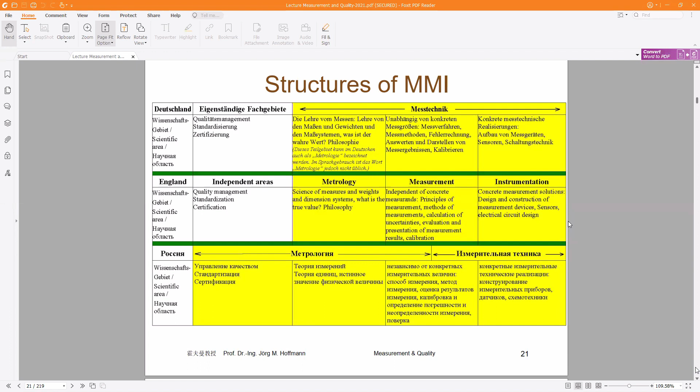Really sure at the moment. Oh, sorry. Sorry, here was a mistake. Can you see my slides now? Yes. Yes, that's great. Then has it worked? Yes, that was the last slide from the last lecture, I think.

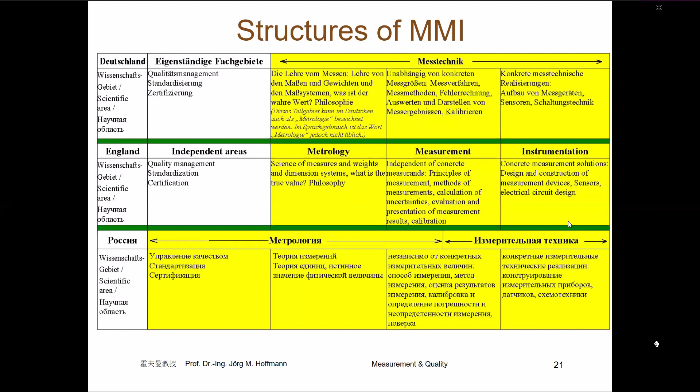You have seen that we have different definitions of the areas of measurement and instrumentation in different countries. And that was, let me say, the end of the last lecture. And now we start with the concrete content of measurement and instrumentation. What I will tell you next is valid for every field of measurement. Everything you would like to measure, it is valid for that.

When you measure a temperature or a speed or a voltage or, let me say, strain or what else, what we speak about in the next lectures is valid for everything, and therefore it is very important. That means I explain to you at first the structure of a measurement system, and after this we will speak about the calibration of a measurement system, and we will speak about errors, random errors, systematic errors, two different kinds of errors, and all these things are valid for everything you would like to measure.

Let me start with the general information system, and you see here the boxes. The first is the information source. We call it also a process. A process can be everything. That can be a room. And in this room an infinite number of informations can be produced. For example, the temperature, the humidity, how many people are in this room, the pressure, the brightness, everything is possible. And then you have the signal conversion with the sensor.

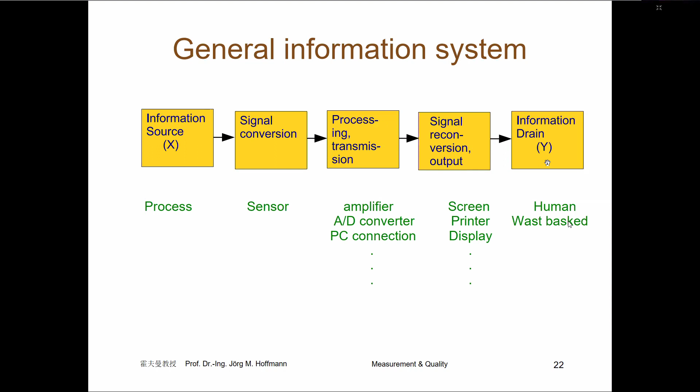Now, I go a moment back. I have told you y is x. It's the only right function that we aim for over the whole system. But in many cases, it isn't so. It can be linear, but it must not be linear. And here I have now connections between the input and the output side for the static behavior of the system. The static behavior describes the dependence of the output value y from the input value x. Normally, it should be y is x, but it must not be so.

So, where is my mouse? Sorry, I must look for my mouse.

Now we have it. During the static status of the system, and then is of course the question, what is the static status of the system? The static status is achieved when, with no changes on the input side, all dynamics on the output side are finished. Both input side as well as output side are in a static status. That means you should have no changes on the input side and you have no changes anymore on the output side. Ideal would be the behavior y is x, but it must not be.

It can also be in this form, and you see here you have a linear function with an amplification. The m is the amplification and n is the 0 point. You see the n is not 0 and m is not 1. Normally m should be 1 and n should be 0, so that you have y is x. But in this case, it isn't so. And you can also have nonlinear functions. In many cases, you have nonlinear functions, especially from the sensors. And then you can describe the amplification and the 0 point only in a very small point.

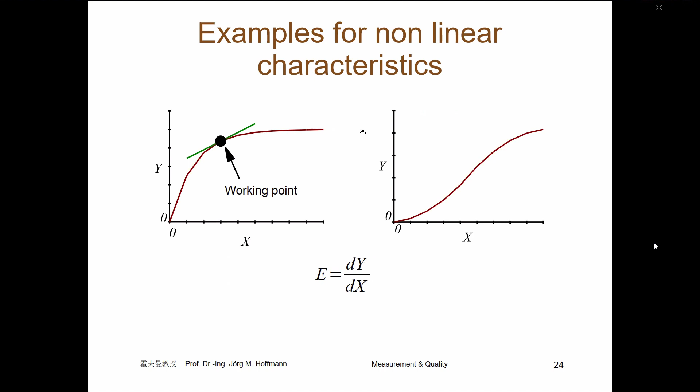But let me go back to this point. We say you have no changes on the input side and no changes on the output side. Then you look for the dependence from the output to the input side. The dynamic behavior is what the device is doing in the time until the static behavior. And now the question is, where is the dynamic behavior finished and we speak of the static behavior? The theoretical definition is when there are no changes on the input side and no changes on the output side. But when is that theoretically? Theoretically, that is in an infinite time.

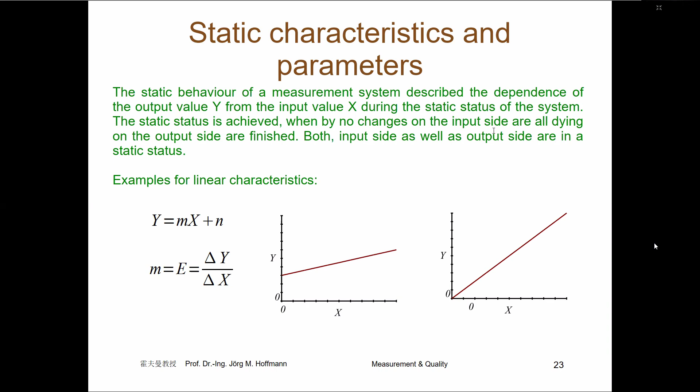When you have, let me say, a thermometer, and you put the thermometer in cold water, you see how the temperature is going down, or in hot water it is going up, and it will decrease or increase until a static value. But when you look with a magnifier and zoom in, you will discover that you have every time again a little change. And so the static behavior is achieved in an infinite time. That is the theory. But for practical work, we need a different definition for when we declare the dynamic behavior as finished, when we declare it is now in the static behavior. And how that works, we will see now.

Here we have the definition of the dynamic characteristics and parameters. The dynamic behavior of a measurement system describes the dependence of the output value y from the input value x until the static status of the system. And we have learned already the static status of the system is achieved theoretically in an infinite time. You will normally never get the static behavior in practice.

And to clarify that, we look at how we measure the dynamic behavior. You have here a function generator, you have the measurement system, and you have a registration equipment. And let me make a very easy example. You have a pot of hot water. That is your function generator.

When you measure the temperature, you put a thermometer into this pot of water, and you see how the thermometer is going up with the measured temperature. That means the measurement system is the thermometer, the function generator is this pot of hot water, and the function is a jump function. You jump with a thermometer from, let me say, room temperature to the hot temperature. It's a jump from one value to another value.

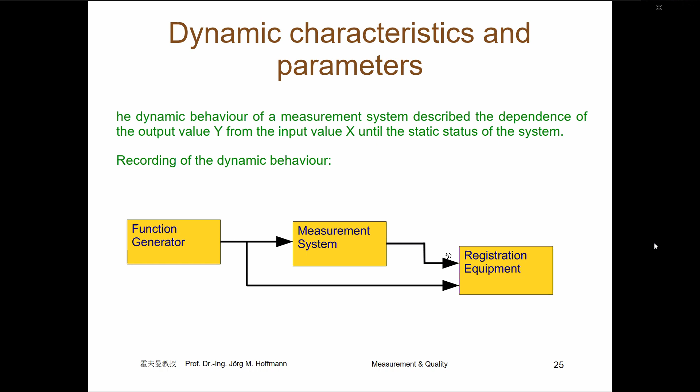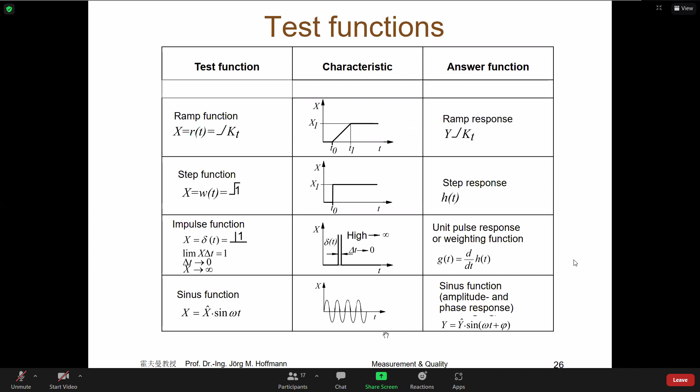Then I go a little bit back. What I have explained now is this so-called step function or jump function, where you go from one value to another value. You can unify it to one, so that you have every time the same function. In a time t0, you go from one value to another value, and what you are looking for is the step response. And when you have a thermometer, the step response would go up and would go to this value.

When you, let me say, give 80 centigrade water temperature on the thermometer, then you expect that the thermometer is in the status of 80 centigrade. But it must not be the case. You can also have 81 centigrade or 97 centigrade. Then you know there is an error in it. But also this is a static behavior.

The next point is what you can do in the time range. You see, we have here the time range. What we can do in the time range we can normally also do in the frequency range, because the frequency is 1 divided by the time. And when the frequency is 1 divided by the time, everything you do in the time range, you can also do in the frequency range. And that is the case.

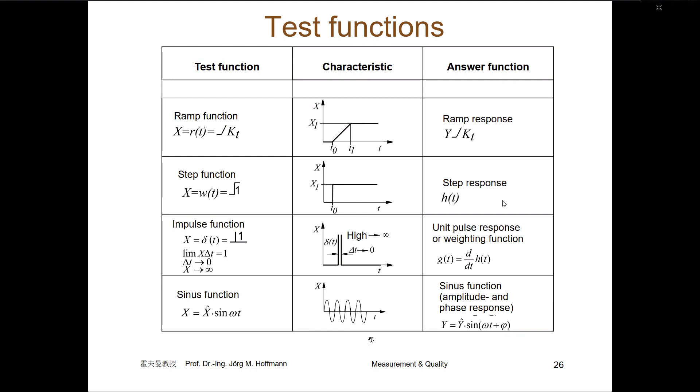So those are the most important functions. We have some different test functions, but I think we can skip them. That is not so important for our lecture now. Yes, that is a step function.